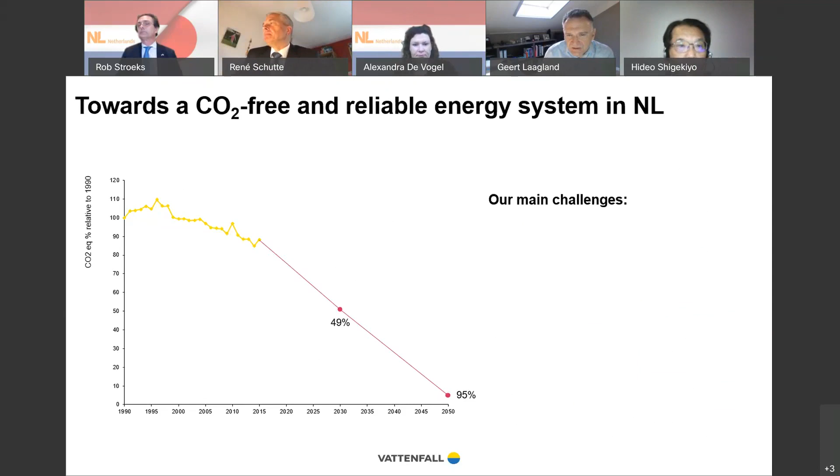If we look at this graph, then we see the CO2 emissions developing since 1990 and where we have to go in 2030 and 2050. And if you see what happens until a few years ago, there was still a decrease in CO2 emissions, that's fine, of course, but we have to accelerate the decrease of CO2. So we have to achieve a further deep CO2 reduction. We also face a declining domestic gas production, so we will be a gas importer in the end. And we really have to accelerate our CO2 reduction efforts in order to meet the goals in the future.

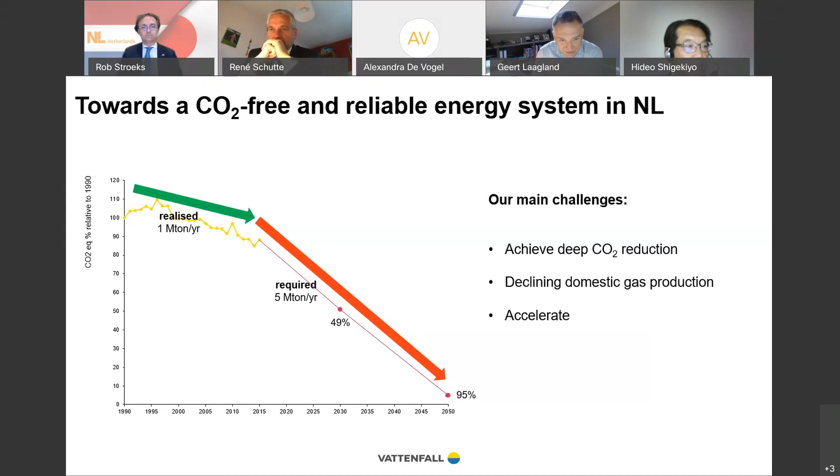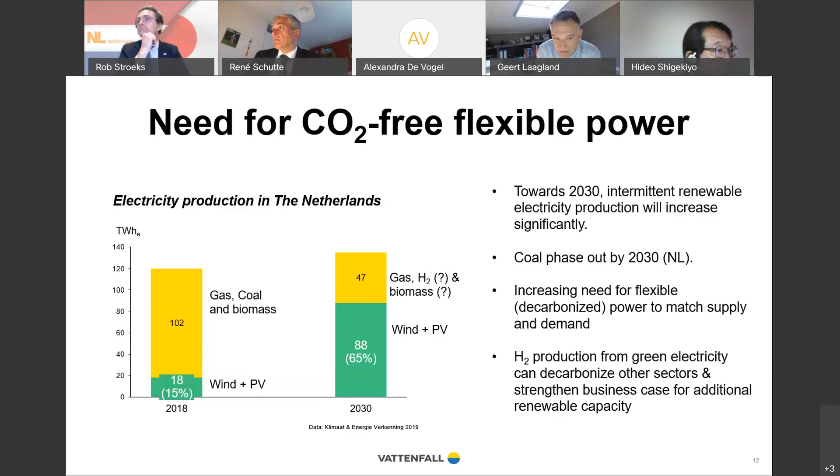We also have some particulars in the Netherlands. It is not allowed to fire coal anymore after 2030. Another element is that if you have this increase in wind and solar, you also have a need for more flexibility in power generation. So gas turbines are a very suitable technology for that. But we also see that if we want to meet the CO2 targets, and we still have to supply about 47 terawatt hours on an annual basis by natural gas, we will not meet our CO2 targets. So we also have to replace the natural gas by another CO2 neutral fuel, like for example, hydrogen or biomass.

If you look at the options to fill in this need for flexible power generation, the options are quite limited. Of course, you can consider biomethane, but biomethane is only limited available. If you look at biomass, there is also restrictions. Of course, you can use biomass from the direct surroundings of the power plant or the country, but there are also discussions on if that's the most wise thing to do with biomass, or that we, for example, should use it for the production of our materials rather than burning it for power and heat generation.

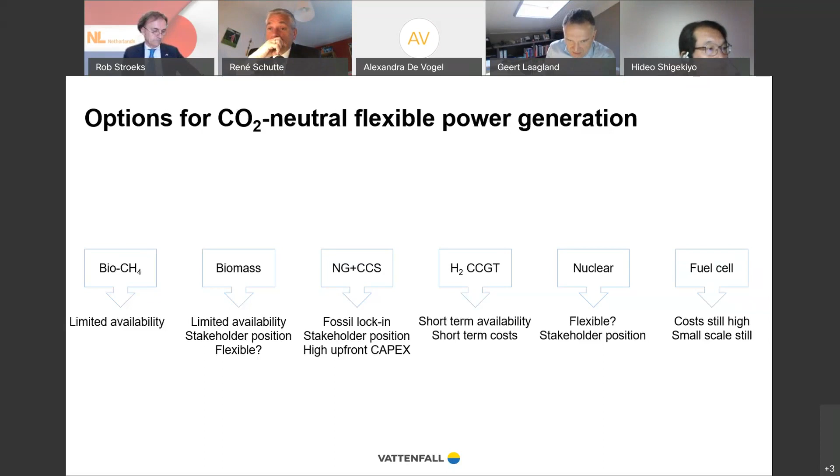Another option is natural gas with CO2 capture and storage, which is of course possible, but also implies a lock-in on natural gas usage, and one of our main aims is to become fossil-free within one generation. Hydrogen is a good option, but is of course also expensive. Come to that later. Nuclear is disputed heavily in the Netherlands. The discussion is reviving at the moment, but it is not a simple one to implement. And you can also question how flexible this option will be. Fuel cells are still in development and do not have the scale yet to supply power on a large scale.

So considering those options, our opinion is that hydrogen can play a very important role in filling in this flexible power generation need. It will also provide long-term value to the Dutch energy system, since hydrogen is needed not only for power production, but also for industry, transportation, and high temperature heating applications. That's why we think if we do it on a national scale, a national hydrogen backbone, then this provides important options to use hydrogen in gas turbine plants.

Of course, we have some challenges. One of them is the availability of hydrogen - that's not the case yet, that we have large amounts of low carbon hydrogen. Hydrogen combustion in combined cycle gas turbines is also not a given yet. There are developments, it's also possible to combust 100% hydrogen in gas turbines, but not in a way that we would like to see, so there's still development needed. And of course, the business case is really challenging because it's more expensive than natural gas, so support schemes are really necessary to make this fly.

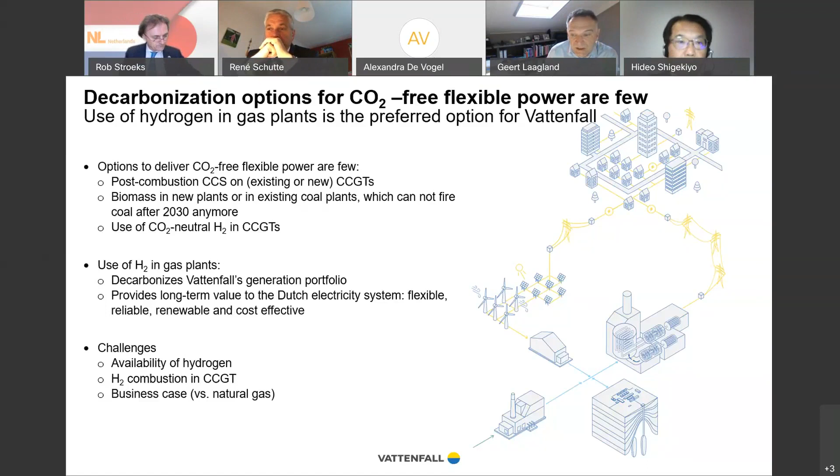So we developed the H2M project, together with Equinor and Gasunie. The Magnum project is an existing power plant, built by Mitsubishi Power. It was commissioned in 2013. It has a total capacity of over 1,300 megawatts, 3 units, and our aim is to convert 1 unit to low carbon hydrogen - basically blue hydrogen produced from natural gas with carbon capture and storage, and the CO2 will be shipped to Norway and stored in an offshore CO2 storage facility.

Mitsubishi Power is our technology partner for that, so they have supplied this power plant, but they also have the hydrogen combustion technology and are still working on new technology that will be needed for this project.

Our main objective for this project is to kickstart this H2 economy. If you want to build an infrastructure in the Netherlands for hydrogen, then you also need scale. That's the reason why we want to start with blue hydrogen and in the end change over to green hydrogen, which is produced from excess renewable power supply. The CO2 emission reduction potential is about 2 megatons per year, and we want to gradually change from blue to green hydrogen to make it completely fossil free.

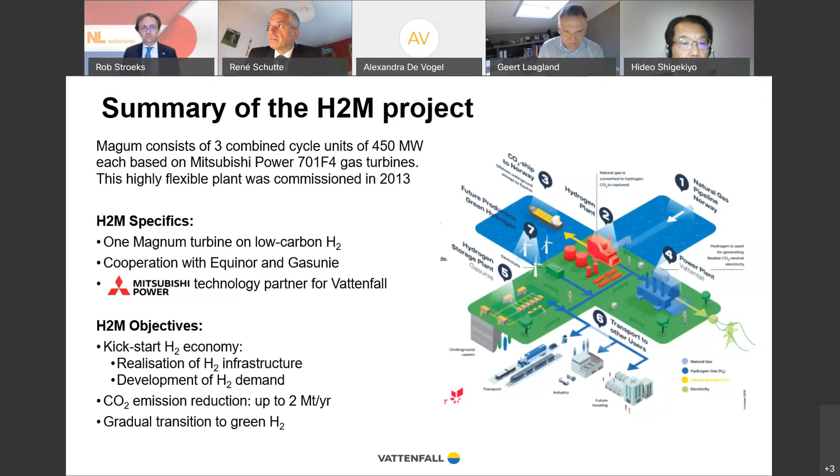Looking at what we would need from Japan, I think Japan, in my view, is a front runner in the area of hydrogen - introducing hydrogen, building up the hydrogen economy. I think we can learn from that, and maybe it's also the other way around. But at the moment, I see that Japan is quite ahead of things, so that's really good.

If I look to technology, then of course we are interested in electrolyzers, because electrolyzers are really critical to produce green hydrogen in the long term. The scale of electrolyzers needs to increase, the specific investment cost for electrolyzers needs to come down, and that's all related to technology development. Technologies for transporting and storing hydrogen are really important. Japan is also working on this with liquefied hydrogen, for example, but also with liquid organic hydrogen carriers. So there's also a lot of technology being developed in Japan which we can learn from.

And as I said, dry low NOx hydrogen combustion is also really important if we want to introduce it into power and heat generation. One example is the multi-cluster combustor development of Mitsubishi Power. Of course, if I look to transportation in Japan, hydrogen is also really kicking off there. A lot of technology is being developed, and that will also help the decarbonization in the end.

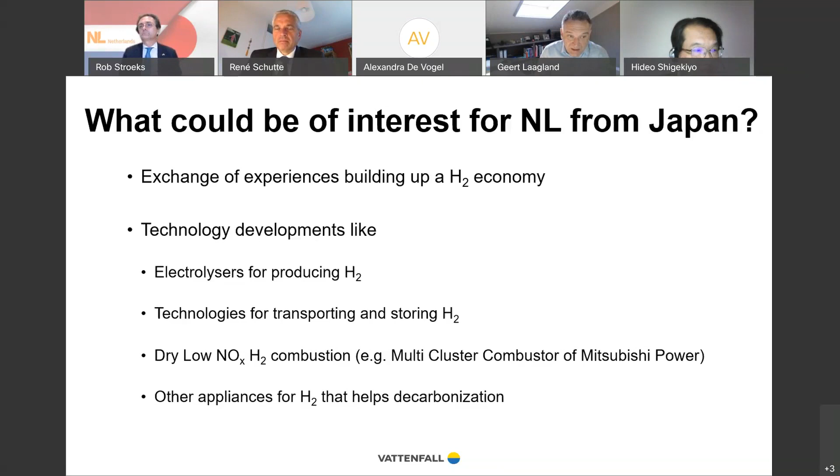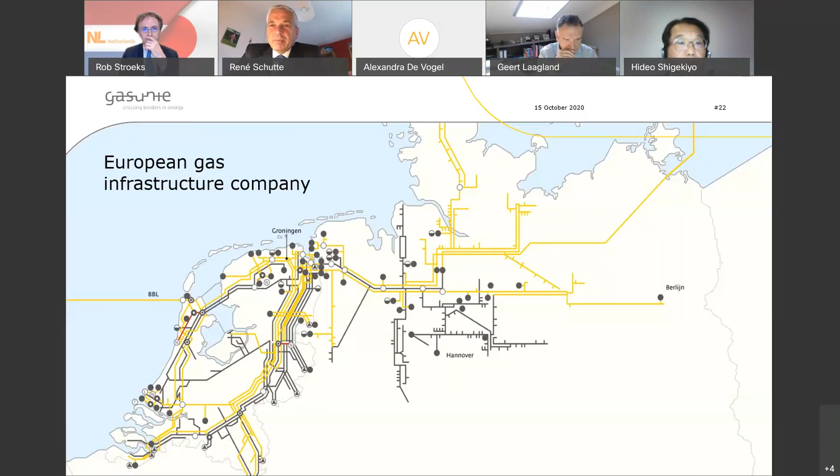Next slide, please. We have several strategic routes, and one of them, in the sustainable environment, is looking at what's going through our grid in future and through our assets in future, where we basically see green gas being an option for future transport, heat networks. We also look at CO2 capture and storage, and not the least, hydrogen. Combined, this is what's on our agenda at this moment to help accelerate the energy transition towards 2050.

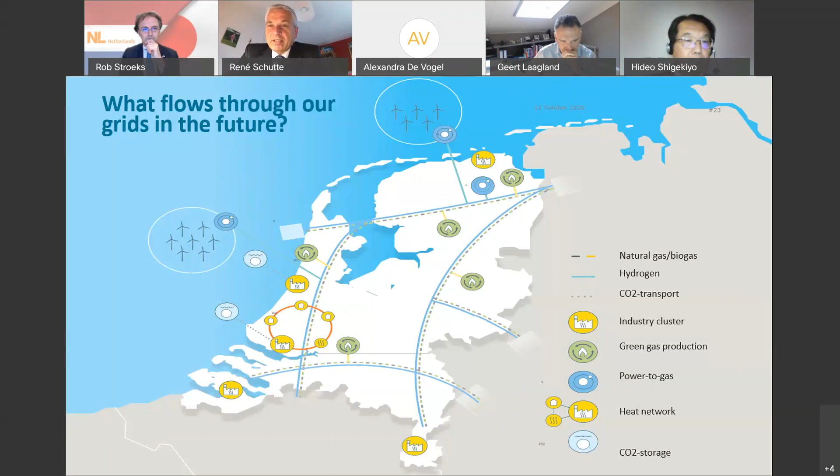Next slide. Just to start with the hot summer we just had - the strategic hot summer - you saw that Japan already came with a hydrogen vision and strategy in 2017, almost 3 years ago. This summer it was picked up by many countries, and some have their strategy in preparation, meaning hydrogen has become top of the agenda as people recognize more and more that this is a missing key element of the energy transition.

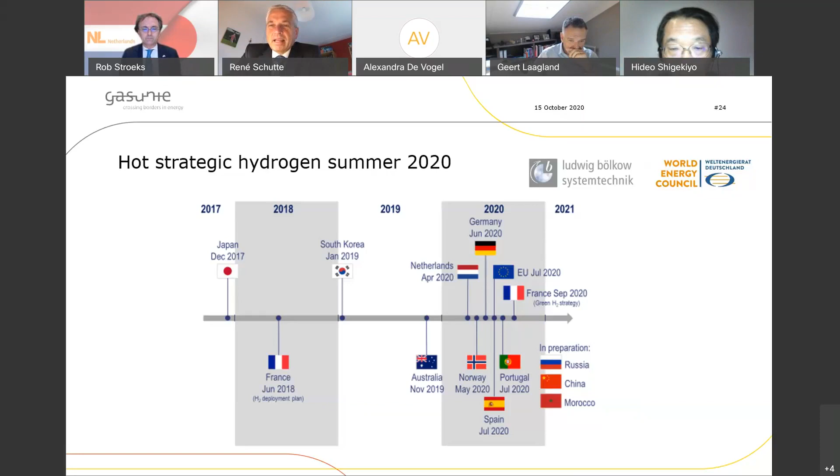Next slide, please. And what it's all about - this is basically the landscape of why we are looking into hydrogen. On the bottom left, you see the picture of the current energy flows through the Netherlands, where electricity is only 20% of the energy used. Gas and oil take 80% as molecules, of which gas is 40%. But what you can see on the blue line, which is the gas line, is that all the flexibility - the difference between demand and supply - is covered by gas. So that's a key function that needs to be replaced in future by another system, and hydrogen can do that.

If you look at the top right, you see the renewable energy, the daily electrical production and load profiles, where you actually see what the increasing problem is with renewable energy, that it's not as stable in production as we are used to with, for instance, power plants. That means we need to cater for another volatility of the renewable energy production, meaning that it's not only the flexibility we know today, but also the flexibility that will increase in future that we need to cater for.

Hydrogen can do this. Hydrogen can be transported about 10 to 20 times cheaper compared to electricity. And storage of hydrogen, which can be done in caverns, can be about 1,000 times cheaper than storing the energy in, for instance, batteries. Next picture, please.

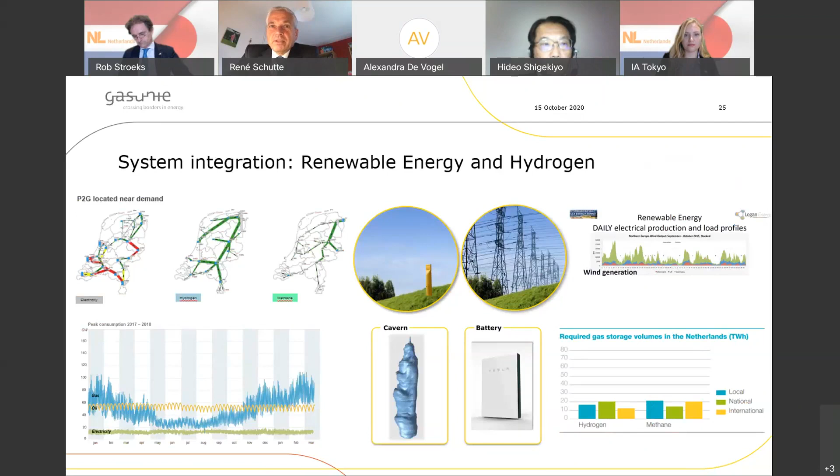The aim from the Dutch climate agreement and also the hydrogen vision of the cabinet of the government is 500 megawatts in 2025 till 4 gigawatts in 2030. And for this, you need to understand that 4 gigawatts also means 4 gigawatts of renewable power. So, for instance, 4 gigawatts of installed power for wind at sea, wind at land, or solar power, which is also a challenge in itself, to have that installed by 2030, which would be about 1/3 of the planned renewable energy sources in the coming decade.

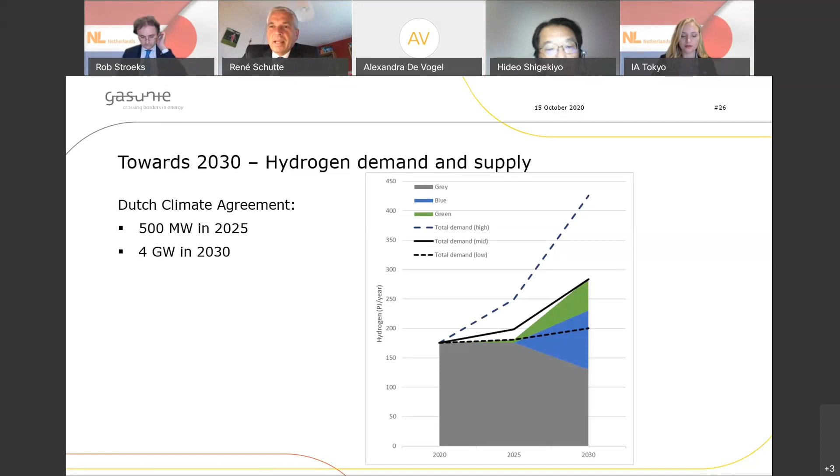Please, next picture. And the key elements that we need to build up this hydrogen market is infrastructure, to bring demand and supply together, and also to connect it to storage.

together with the government, we are doing a study to determine what is required in technical and safety terms, but also in business case, law and regulation, and demand and supply, to basically face the construction of this infrastructure in the current decade. Together with infrastructure companies all around Europe, we made a map of how this infrastructure can be built from existing gas grids into a wide European net by 2040, meaning that with that we can connect all demand and supply locations with existing infrastructure, and of course with storage that we have at several places in the Netherlands.

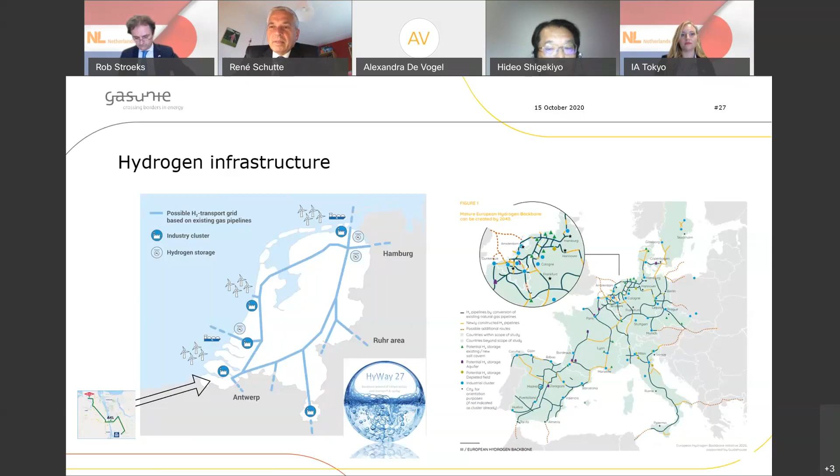We can connect this to storage on the eastern border between Netherlands and Germany. There's, let's say, a large salt mountain underground, where a lot of caverns can be made, and a lot of caverns already exist, but now are used for natural gas storage. We also look at import of hydrogen, because we believe that only part of the hydrogen that we need in future can be produced in the Netherlands.

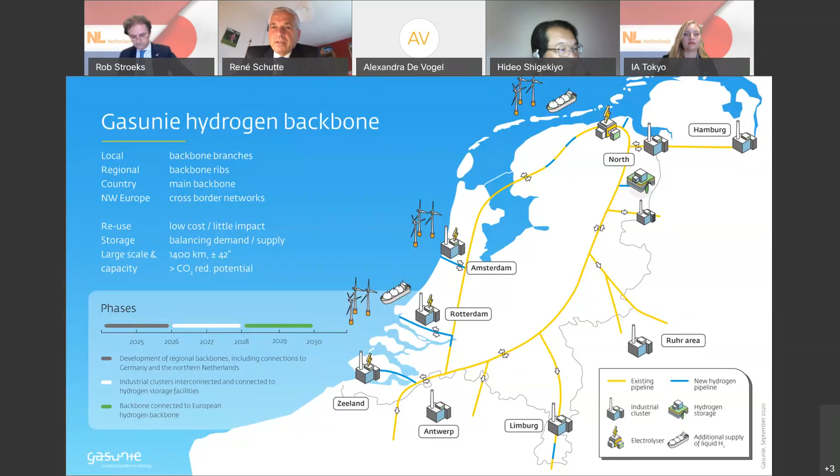This together is the map of projects that Gasunie is involved in the Netherlands. This is what is required to build up that infrastructure, because the infrastructure will only be built if customers have need for it. That means we also need to help develop the production of hydrogen, and we need to help develop the demand for hydrogen. So building the full supply chain, because without the value chain, we don't need infrastructure, and all the projects will not come to life.

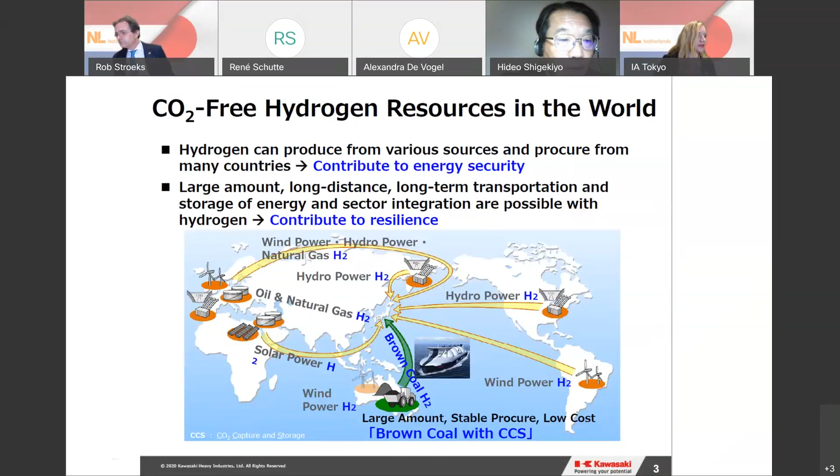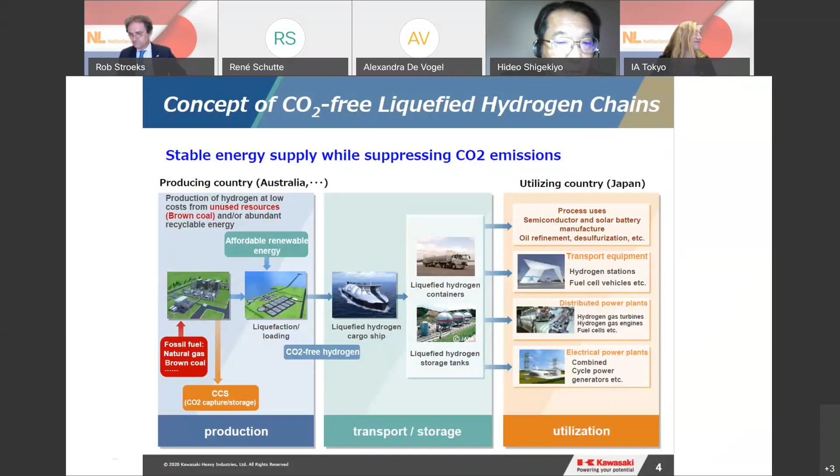This slide shows the concept of an international liquefied hydrogen supply chain. We will produce hydrogen overseas from affordable resources such as renewable energy or unused resources. Even using fossil fuel, by using CCS technology, we can produce CO2-free hydrogen with almost no atmospheric CO2 emission. After that, we bring it to Japan as liquefied hydrogen. Finally, we will use hydrogen in various fields. We believe this large-scale supply chain will accelerate the realization of decarbonization and a sustainable future.

Next is about our hydrogen technology. To realize a full liquefied hydrogen supply chain, Kawasaki has developed various cutting-edge liquefied hydrogen products. In production, we have already succeeded in developing a liquefier for the first time as a Japanese company.

In storage, Kawasaki has provided a number of liquefied hydrogen tanks and containers to the market since 1970. For instance, in the Australian demonstration project, we have almost constructed a 1,250 cubic meter storage tank for the carrier and a 2,500 cubic meter tank at the loading base.

To transport a large amount of hydrogen over the sea, we have constructed the world's first liquefied hydrogen carrier. In order to reduce the cost of hydrogen, it is necessary to consume a large amount of hydrogen. Therefore, Kawasaki has developed a hydrogen-fired gas turbine cogeneration system in the Kobe area. It is a very effective system for hydrogen consumption and cost reduction.

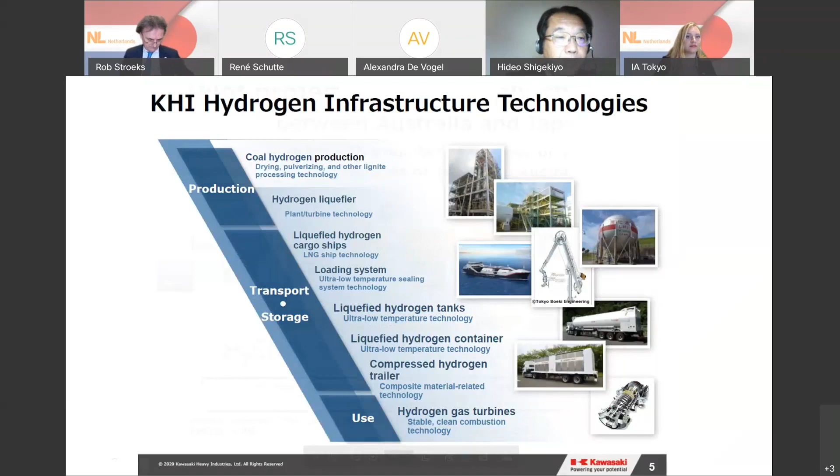To realize the commercial supply chain, we have been conducting a pilot demonstration project between Australia and Japan since FY2015. This is about the pilot demonstration structure of the liquefied hydrogen supply chain.

In this demonstration, there are two portions: one is the NEDO portion and the other is the Australia portion. The scope of the NEDO portion includes gasification in Australia, the hydrogen carrier, and the unloading terminal in Japan. On the other hand, Australia's scope is gas refining, liquefaction, and the export loading terminal in Australia. We are working on this project in collaboration with our partners with the support of each country's government.

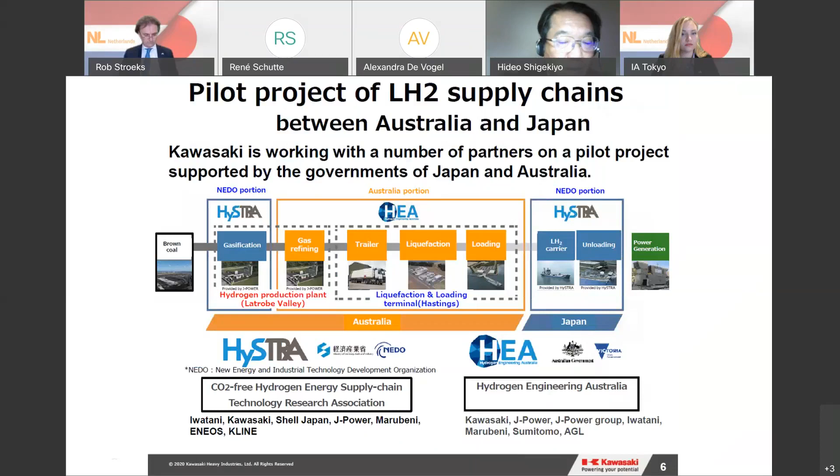At the end of FY2020, we will supply liquefied hydrogen from Australia as a pilot demonstration. The upper pictures are the Australian bases. They are being constructed on schedule.

The lower left picture shows the construction status of the liquefied hydrogen carrier ship. Last December 2019, we held the launching ceremony of this carrier ship at our Kobe factory. Its name is Suiso Frontier. The carrier is currently being outfitted and will be completed soon. The lower right picture shows the liquefied hydrogen loading base in Kobe Airport Island. Almost all equipment and tanks have been completed.

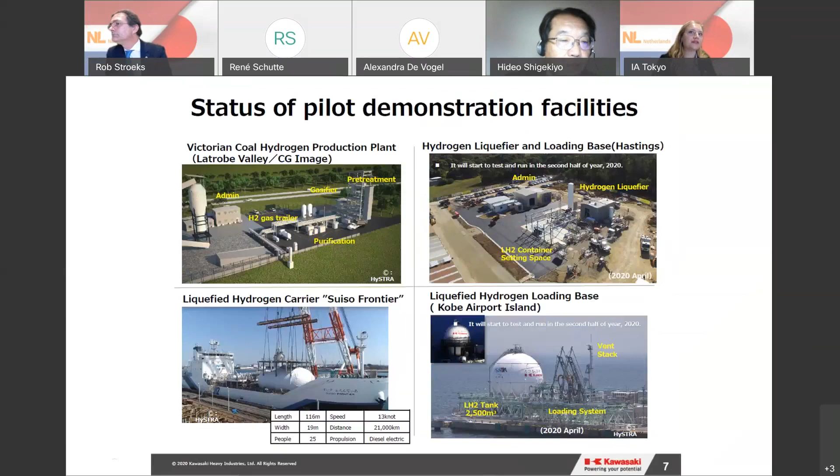Next is about the demonstration for hydrogen utilization. This slide shows our hydrogen CGS demonstration conducted in Kobe City. CGS means cogeneration system. It's the world's first to supply electricity and heat by burning 100% hydrogen in a gas turbine in an urban area.

This project was carried out from November 2015 to February 2019. Recently, Kawasaki has announced a new dry, low NOx hydrogen gas turbine system also developed. The technology verification test started in May this year and was the first successful test in the world. The dry combustion method has higher power generation efficiency than the conventional wet type method and can reduce NOx emissions.

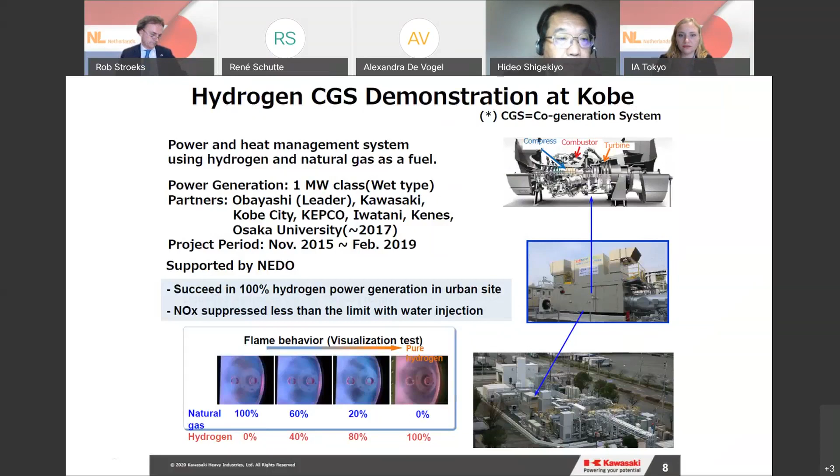On the final page here, we would like to ask the Netherlands for several matters. For the first request, Kawasaki has been developing state-of-the-art hydrogen-related products, and in the near future we plan to sell these products all over the world. At that time, we would like to recommend our products to Netherlands and European companies who are interested. We not only provide products, but also support EPC jobs at required hydrogen loading terminals, based on our experience.

The second request: we would like to ask for your cooperation so that we can participate in hydrogen-related feasibility studies and demonstration projects currently under consideration in the Netherlands and Europe. Especially if you have a liquefied hydrogen plan, including liquefaction, storage, and marine transportation, please recommend it to us.

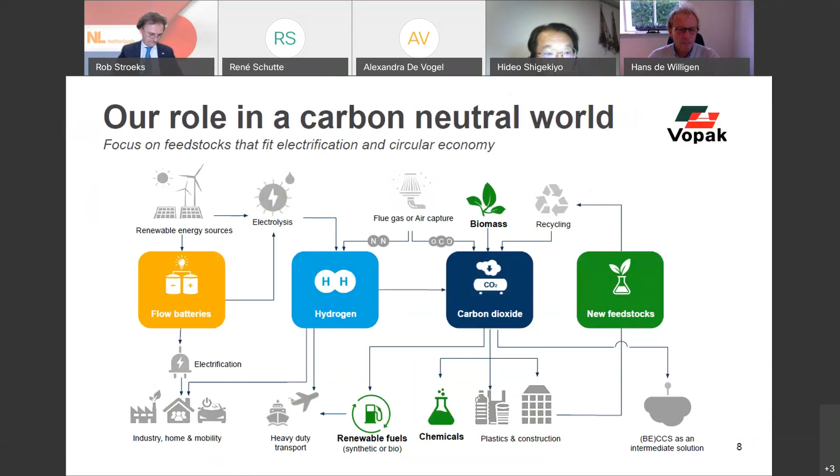The largest one at the moment we are focusing on is hydrogen logistics. I'll come to that later after this slide. We're also involved in projects which involve the storage of carbon dioxide and the reuse of carbon dioxide, for example in renewable fuels or reuse in chemical production. We are currently involved in quite some projects to get storage and shipping for carbon dioxide organized in our region. The fourth one has to do with green feedstocks, new feedstocks, and recycling of plastics, for example, to reuse those again and become more circular in the use of those feedstocks for the chemicals, plastics, and construction industries. So four key focus areas, and I'll now turn to hydrogen on the next slide, please.

We as Vopak are currently involved in three types of technologies that we think all have a place in the years to come when it comes to building supply chains for hydrogen. Liquid hydrogen - I thought an excellent presentation from Kawasaki Heavy Industries. We also want to learn from that, particularly because we think that liquid hydrogen, eventually at large scale, can become a very competitive and meaningful way of transporting hydrogen globally. There are some challenges and development areas, I think, to bring it really up to large scale.

That, of course, is the cooling technology to liquefy hydrogen at very low temperature at large scale, and of course the significant investments related to that, not only on the tank storage side, but also on the shipping, regasification, and liquefaction parts. But it's similar to, or analog to, LNG. We operate LNG terminals already around the world, and we think we can derive some knowledge from that and apply it to building liquid hydrogen supply chains going forward.

The second one is the liquid organic hydrogen carrier technology, a technology to transport molecules of hydrogen while connected in a carrier material. We are working towards several projects and pilots in our region and also more and more in the East. The big advantage of LOHC technology is the use of existing infrastructure and the safe and easy way we can handle it. Some challenges have to do with energy efficiencies in the LOHC technology and reactor upscaling. End markets today are typically focused on mobility and heavy industries. Later on, while achieving economies of scale, this LOHC technology can also be used for larger industry use.

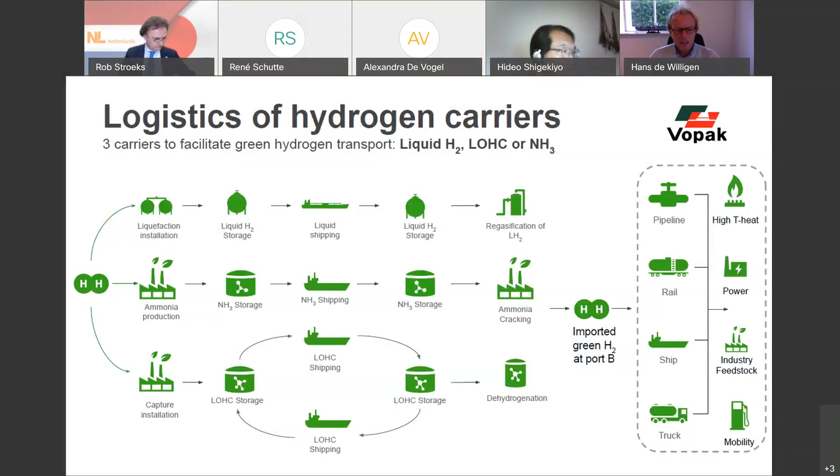What we are currently doing, and have built - go back to the previous one, please. Thanks. What we have done is build both supply chain modeling and financial modeling systems to optimize the full supply chain, and depending on the technology, come to the right conclusion per supply chain development. Each supply chain has a specific typical value chain development and pricing mechanism in place, with which, through our modeling, I think we can define the best technology to be used. And of course, we are more than willing to help the Japanese clients, counterparts, and stakeholders with this technology going forward. Next slide, please.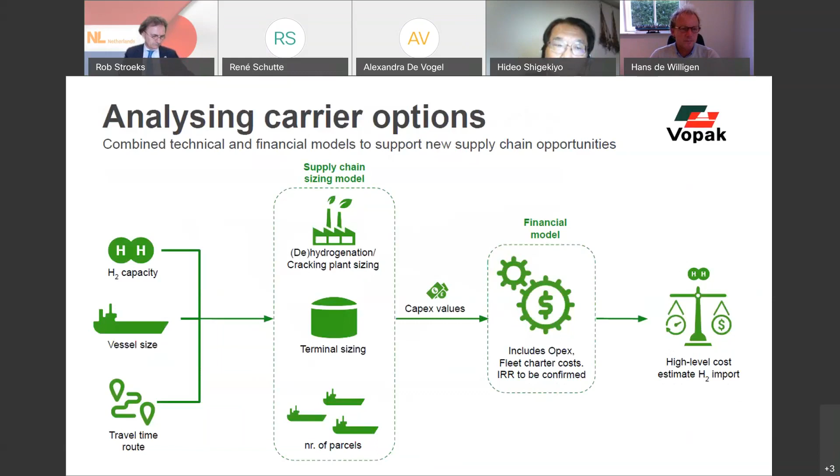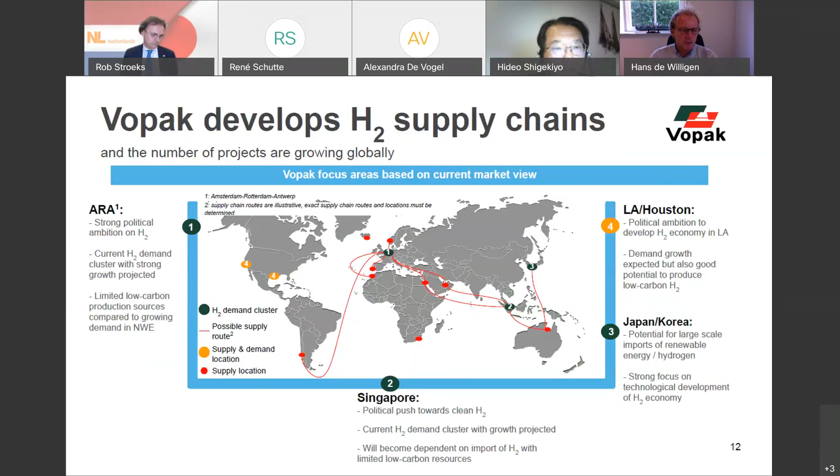This is just illustrative because we are working on many projects around the world, as indicated in the previous presentation. Clearly, supply and demand are not particularly in the same place. Countries and areas with abundant solar and wind energy can support the larger demand centers. With our global network and global presence, we are connected to those developments in current project development, and that is a very encouraging time frame we are in. We are involved around the world, so please connect with us if we can be of help in your region.

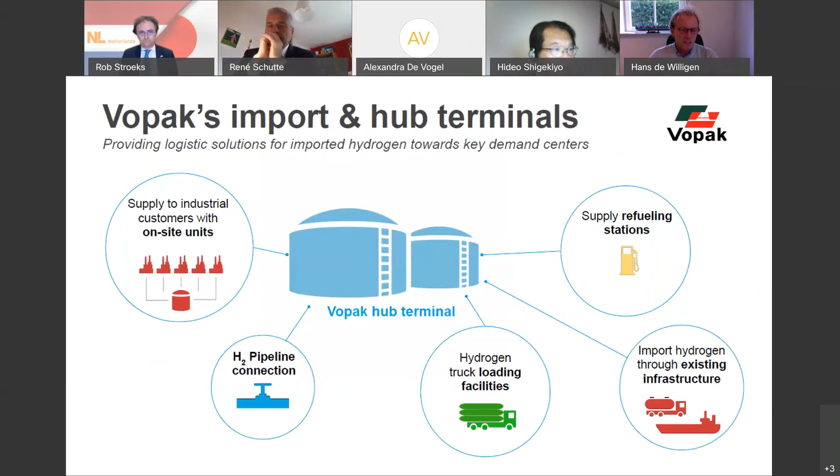This is the final slide to say that through our tank terminals we can really facilitate export, but certainly also the import side, becoming a hub location for any distribution onwards towards industry, road distribution, reshipping, redistribution on fueling stations, and also to integrate with the local industry and supply them with hydrogen from our terminals.

Basically summarizing all this, we think the momentum is growing. There's a strong supply side push from areas with abundant resources, and there is also a demand pull whereby mobility is expected to be the first sector where hydrogen can pick up in the shorter term. Vopak's ambition is to really lead import locations around the world for all the technologies, both liquid as well as ammonia and liquid organic hydrogen carrier. I think we are very well positioned to help the market move forward.